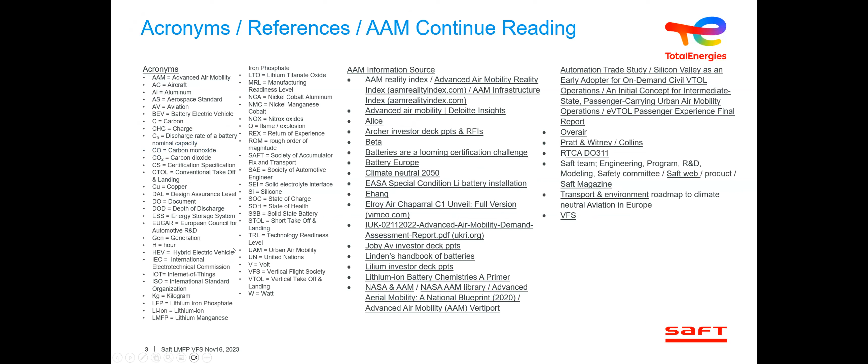implementation, so that we can not only work on efficiency with the more electric aircraft, but also not have to be too frugal by reducing a lot of flight activity, to continue to enjoy our mobility and still meet the goal of carbon neutrality.

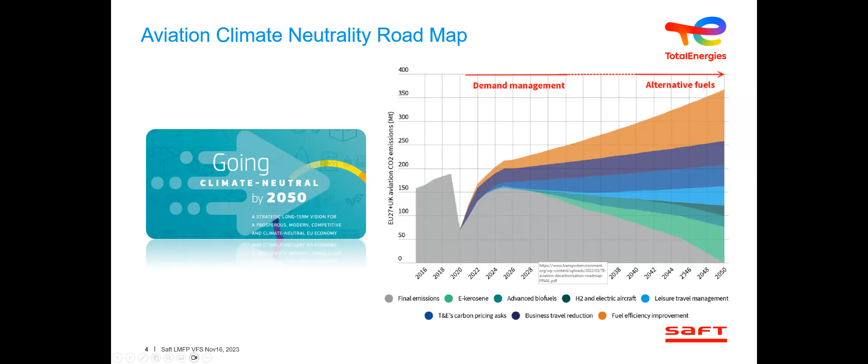So the opportunity for the advanced air mobility is clear. It's an opportunity around noise reduction, CO2 reduction, and NOx. This is enabled by the industry 4.0 and all the latest development. We see all the actors actively taking advantage of all the latest technology to produce smaller, lighter, and more integrated parts. So that's all the opportunity that the advanced air mobility can take care of.

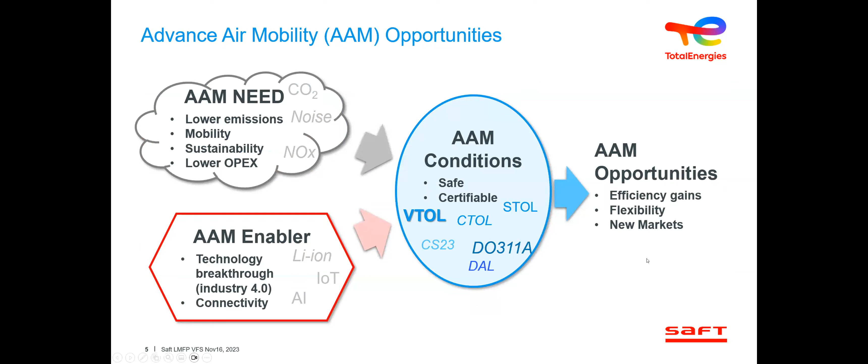Lithium-ion technology and batteries are part of these enablers for sure. But this is always going to be conditional on having safe and certifiable product. So this is kind of the intent of this slide. Mission profile, the various applications of various designs, from full electric to hybrid, to manned or unmanned applications, can be illustrated with all these beautiful designs that we see every day taking flight and making strides towards visibility.

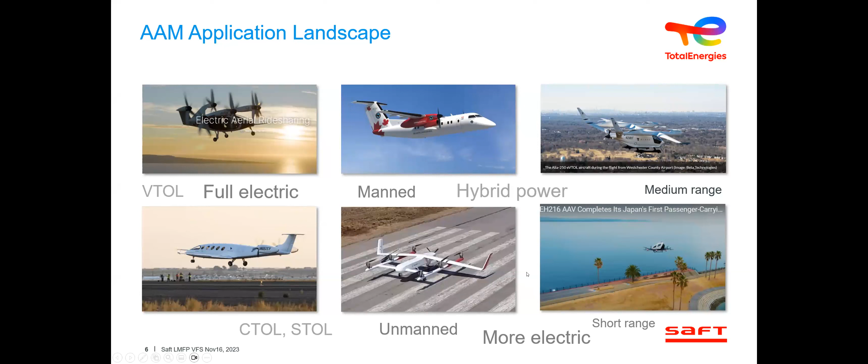So again, lots of different mission profiles, and as a result, a lot of different requirements for the battery system. VTOL application here needs a lot of specific energy and specific power, where the CTOL requires a decent amount of energy, but much less power. So these kind of graphs start mapping the need and requirements of these applications.

And when we start to overlay the capability of lithium-ion chemistry, we realize the feasibility of these applications. So for hybrid, with extremely high power, much lower specific energy, since the application will require smaller cells, the ratio of power to energy is much higher. And so between CTOL, the conventional takeoff, the short takeoff, and VTOL, you can see multiple requirements that can be met by different technologies.

So here we presented solid state, which is going to be much later. Unfortunately, the readiness level of this technology, as we will see, is much lower than some other nickel oxide technology like NMC, nickel manganese cobalt, or LMFP, which is lithium manganese iron phosphate, or some other technologies that are very promising but still in development, like silicon anode and others. But I'll go into a little more detail on those chemistries.

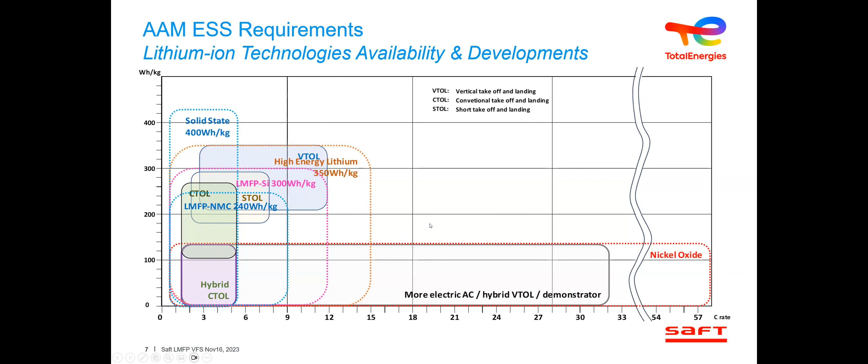So if you summarize the challenge of battery operated vehicles versus hybrid vehicles, you can map this kind of table like that, where when you have specific energy, when you have

Can you guys hear me okay? Yes. Okay, all right, thank you. Sorry, I have no feedback.

So specific energy is very challenging in the VTOL, as it's combined also with specific power, good cycling ability, and the form factor of the aircraft; all these factors of form factor, certification and rechargeability make the VTOL a very, very challenging application. CTOL and conventional takeoffs are much less stringent in their requirements. So again, this is a very high level summary of challenges. But what's interesting is to see the diversity of requirements between the hybrid and pure battery systems, or the different modes of flight.

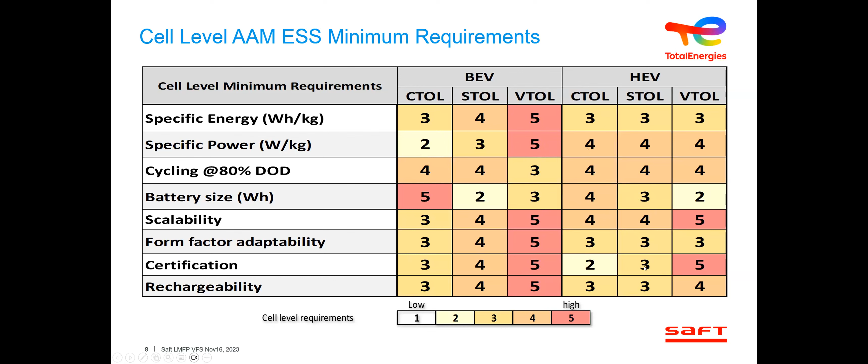So during the design of these, to meet those challenges, the energy storage systems seeking certification have to focus on multiple what we call pillars of safety. The cell design was the selection of electrochemistries and the mechanical design of the cell. We'll see the results of these evaluations a little bit later in the presentation. At the system level, the thermal management is crucial to make sure the chemistry retains its properties over its cycle life. And of course, there is all the BMS and different electronics systems around the battery to keep the integrity of the cell and the performance.

The validation certification is, as you know, paramount for verification of the performance and to make sure the product will perform over an extended period of time and maintain its certification. And that is also the case for the manufacturing, the process capability, providing time after time a consistent product. That's the big challenge for aviation.

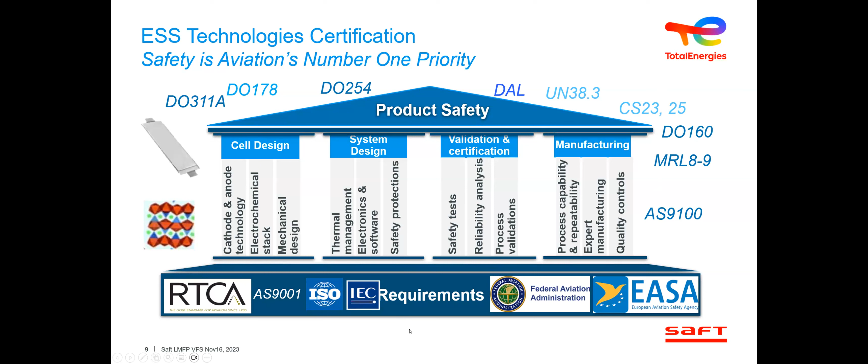Here are just a few of the multiple standards that are floating around the certification process for battery systems. DO-311 and the appendices associated with it is a big one. DO-160 for the environmental, and many others. So those are standards from industry that drive the verification of this safety house around the battery system.

So if we take the battery system for VTOL and try to highlight lithium chemistries, the target on electrical performance is to be greater than 240 watt-hours per kilo. That's a good number. Even if it's challenging, it's still a number that is being pushed towards higher figures, 2,000 watts per kilo combined, and also offering 2,000 cycles. So these requirements, trying to meet these electrical performances and trying to meet DO-311A or safety levels like EUCAR, which is a European standard for safety, a scale of 0 to 7, 7 being explosive behavior, 0 being inert. EUCAR 4 or better, so it's a reversed scale, right? Low numbers are safer, high numbers are more reactive.

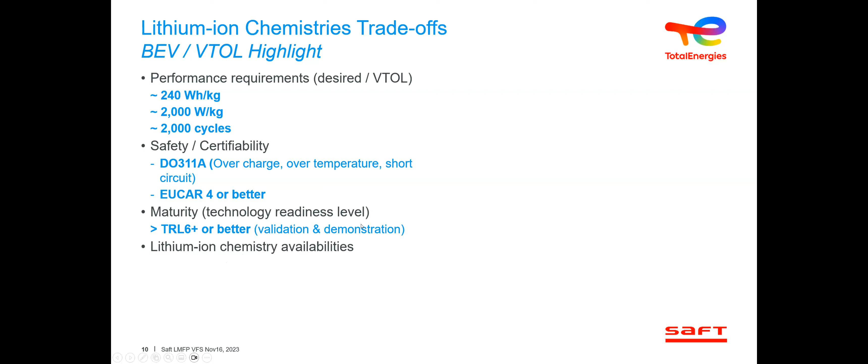The industry also needs good maturity for this technology, with TRL 6 or better technology readiness level, which corresponds to validation. So it's after prototyping, and you're entering the stage of validation and demonstration just before manufacturing. If I take various chemistries that I'm going to go through one by one, the very commonly used currently are nickel manganese cobalt, or NCA, nickel cobalt aluminum, which offer very high specific energy, specific power, good cycling ability, but unfortunately are more towards EUCAR 6 or 7, exhibiting poor safety, decent cost performance, chargeability is good, and the manufacturing ability is okay.

If you look at the chemistry on the anode side, the NMC and NCA is a cathode, so your positive electrode, your negative electrode being a carbon anode. On the LTO, the anode is a lithium titanium oxide type anode, and allows for different behavior, a specific construction that allows for very high charge rates and very high cycling. The cycling ability is unmatched, with over 20,000 cycles. But the low voltage makes this technology have very mediocre specific energy, good power capability. It's able to release its lithium very easily. Very good safety thanks to its very strong stability. So it can charge, be safe and powerful, but cost-wise it is an expensive technology, and its low operational voltage makes it not so good for specific energy.

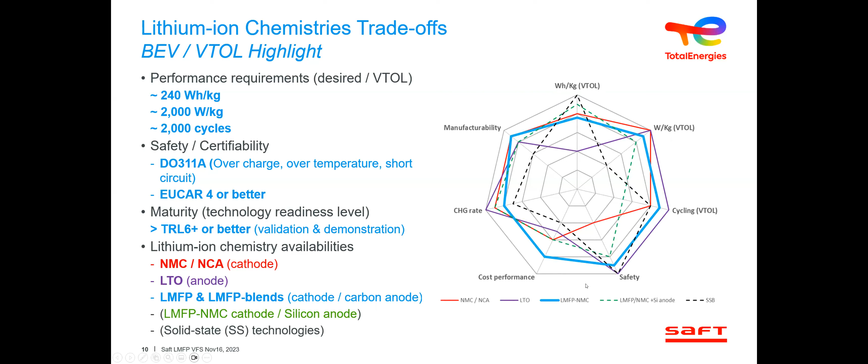So very quickly, the construction of NMC type technology, or NCA, what we call nickel oxide technology. So the very commonly used aluminum substrate onto which basically metal oxides are grafted on. So the NMC appears at the atomic level like this, where it offers layers where the lithium is encased. You've probably seen some very good animations of these structures. Fully discharged, the lithium is kept on the cathode side, and when you recharge, you're migrating your lithium onto the anode side, which is a carbon structure coated onto a copper foil.

So if you were to talk about LTO, this will be titanate oxide instead of carbon, and then on the cathode side, you can have a blend. So you can have LTO with NMC or LTO with LMFP or LFP as you wish. So you optimize and compromise and make selections of your components to obtain the characteristics you're trying to.

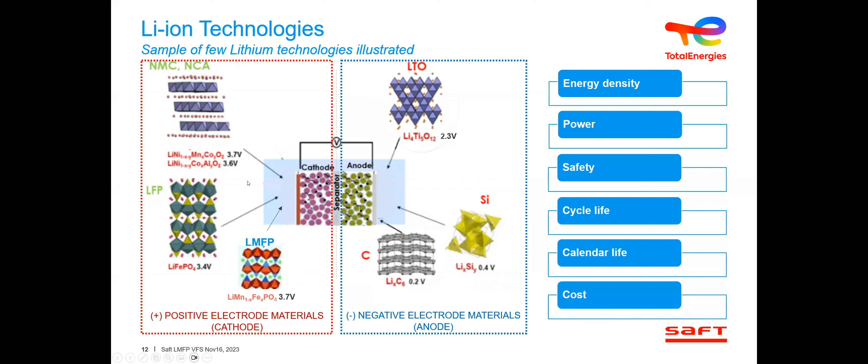So mitigating safety, managing the risk, really mitigating all these components and all this behavior is crucial. So full thermal runaway. The more heat gets placed onto those chemistries, either from external or from degradation, internal mechanisms, short circuits, or other failure modes.

You will have initially a destruction of the solid electrolyte interface, which is why it's important to note this structure onto the anode. So as soon as you have destruction of this, you start a chain reaction of heat buildup that leads other components to fail. Your separator can be next and leads to a hard short circuit, which engages the cathode. Once the cathode is triggered, and they're nickel metal oxide, you have a lot of oxygen being released into the reaction.

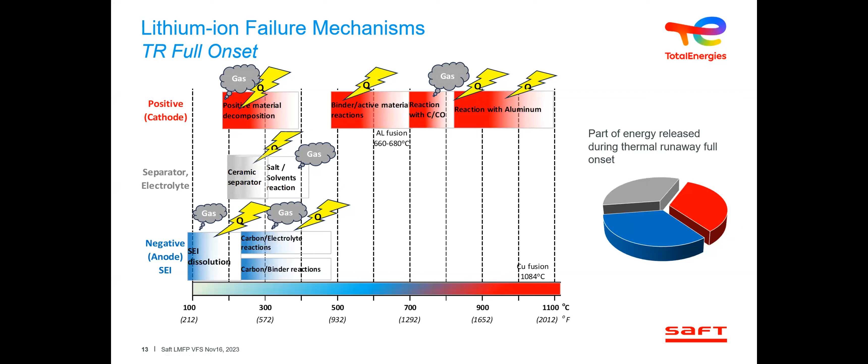And once this is happening, now you have heat, oxygen, and fuel from your electrolyte, which enter this cycle of thermal runaway. The more charged you are, the more energy you have to compound these reactions. But as soon as you have degradation of your substrate, which can lead to the aluminum, the cathode degradation, and/or your copper, you obtain metal fusion temperatures, which are extremely damaging and extremely hard to stop. And this is why you see now the processes of handling thermal runaway through immersion, or trying to drown the battery module with water, or letting it burn.

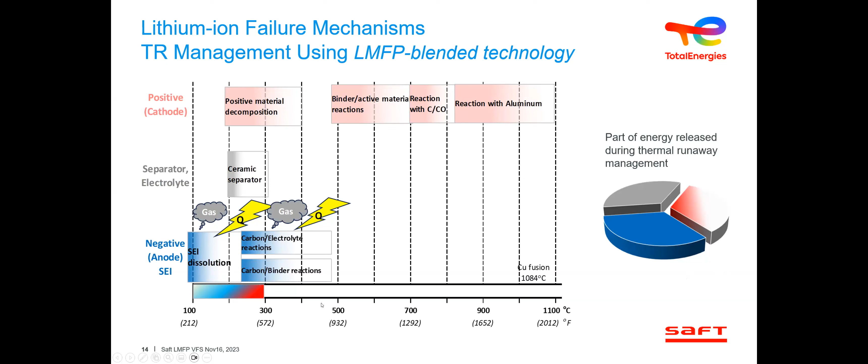So the benefit of having lithium manganese phosphates, or having a more stable cathode structure, is that you minimize a good third of these reactions. So you can conceive degradation of your solid electrolyte interface, having some level of reactivity here. But if you have a strong separator and prevent that cathode from reacting, you can obtain a much more stable system. So this is what we've done.

It's a technology we also call rocking chair technology. You probably heard that terminology. It's because the lithium is going from one electrode to the other, from the cathode to the anode, and vice versa. And the discharge is going from the anode to the cathode. So having a nominal thickness structure and good consistency is paramount to electrical performance and life.

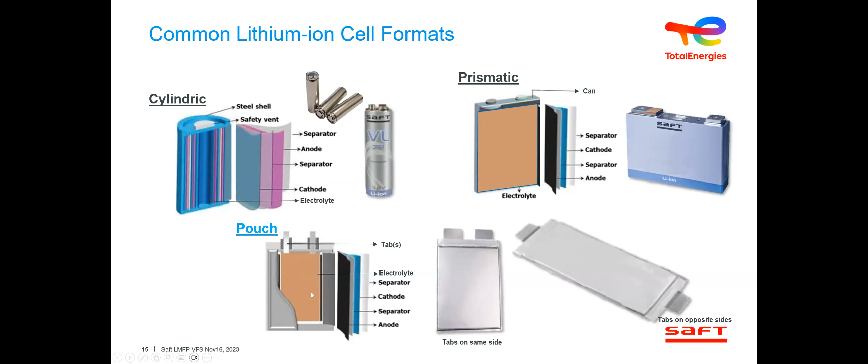You sometimes have issues in a prismatic or dedicated system like that with a very high mechanical shell around it. Even if you put a mechanical safety release mechanism, you still have chances to build up pressure and create very high pressure, very strong mechanical behaviors, versus a cell that can release its pressure very quickly and therefore essentially kill its mechanism of thermal runaway.

Just a very rough summary of what we just discussed here: the value of cylindrical, prismatic, and pouch. In terms of specific energy, having very little mechanical structure, pouch is much better in terms of specific energy. Safety, I was explaining the ability to release pressure, so it's good there. The prismatic format tends to be a good format to have fewer thicknesses, so therefore fewer zones within the cell. So thermally, it's a good candidate as well.

The return of experience and readiness is fairly equal across all these technologies. The industry knows how to do that. Integration is very good for prismatic, a little bit more challenging for pouch, since you have to take into account its mechanical structure and maintaining shock and vibration. Very good for cylindrical. I mean, it's a circle, and so it's very resilient. So a little bit of a challenge here for the pouch.

And future proofing is which technology will come next, right? And as we saw earlier, solid state being kind of the holy grail of technology. We believe that the prismatic format will be favored, since solid electrolyte materials are very hard. They're not very bendy. So stacking sheets in a prismatic structure is much more likely.

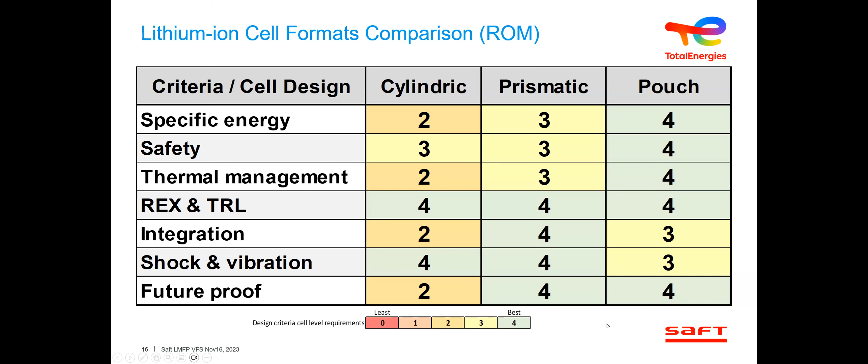And in several systems of cells encased in ESS format, we were able to pass DO-311 in terms of overcharge, over temperature, or short circuit. The technology readiness level is very good as well, with multi-year application experience and demonstration. So we gauge this at TRL 6 plus. We are actually manufacturing these cells on production lines that are used for other pouch systems. So that's basically a manufacturing readiness level of 8 to 9, maximum being 9, which is full production, full commercial realization.